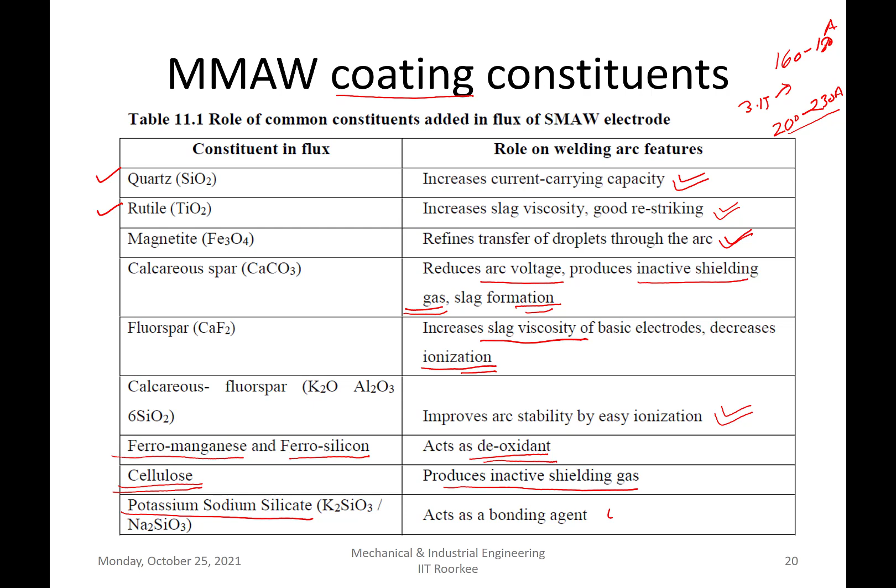And these are the two very common binders, potassium and sodium silicates. These constituents are mixed in potassium or sodium silicate, and then applied as coatings over the electrode, acting as a binding agent. So this was about the role of the different constituents added in the SMAW electrode.

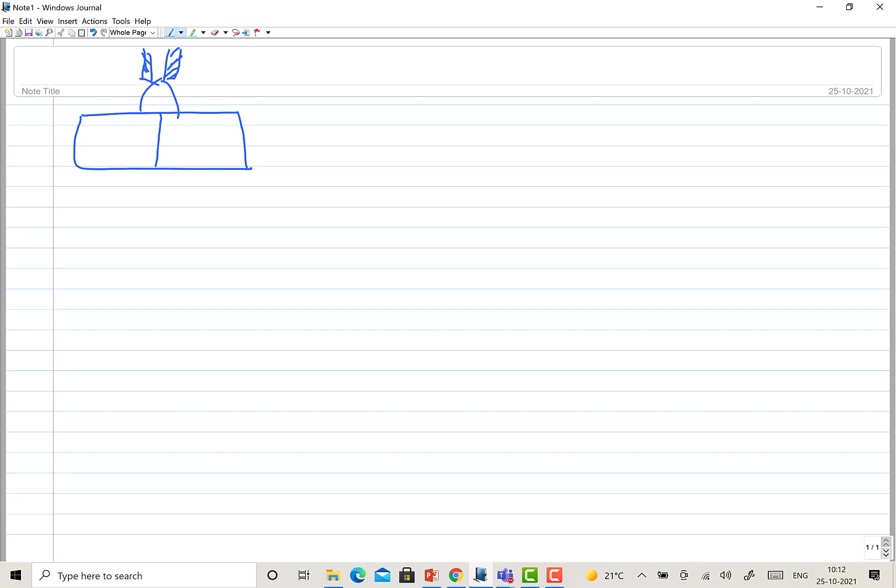Apart from this, important parameters related to SMAW govern the way melting takes place. You have the base metals, and you supply heat through the arc from the SMAW electrode, which consists of the coating and core wire. Depending upon the current flowing and the arc voltage between the two, the power of the arc is decided: V times I, voltage into current.

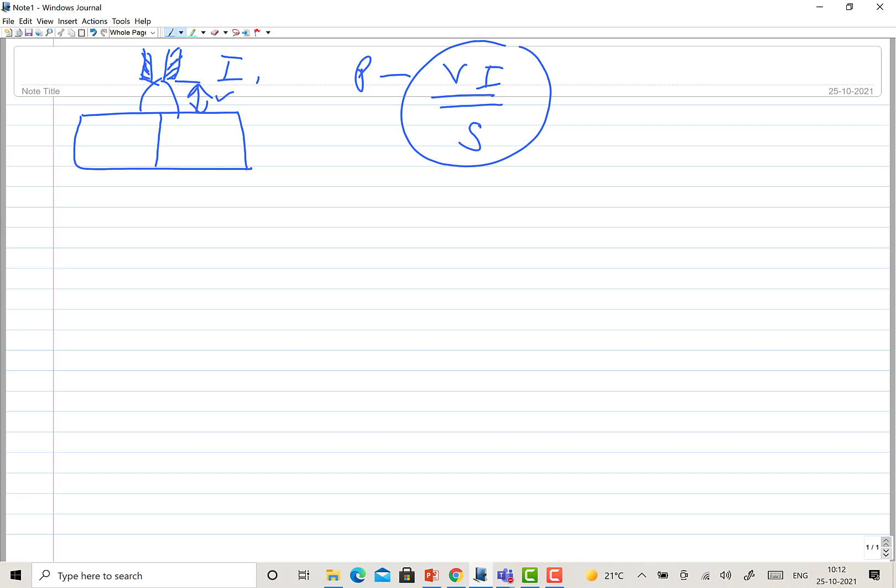Now, at what speed you are moving the arc determines the net amount of heat being delivered. So you are generating heat at a particular rate, but if you move fast or slowly, that will dictate the net amount of heat being delivered, which is quantified as kilojoules per mm.

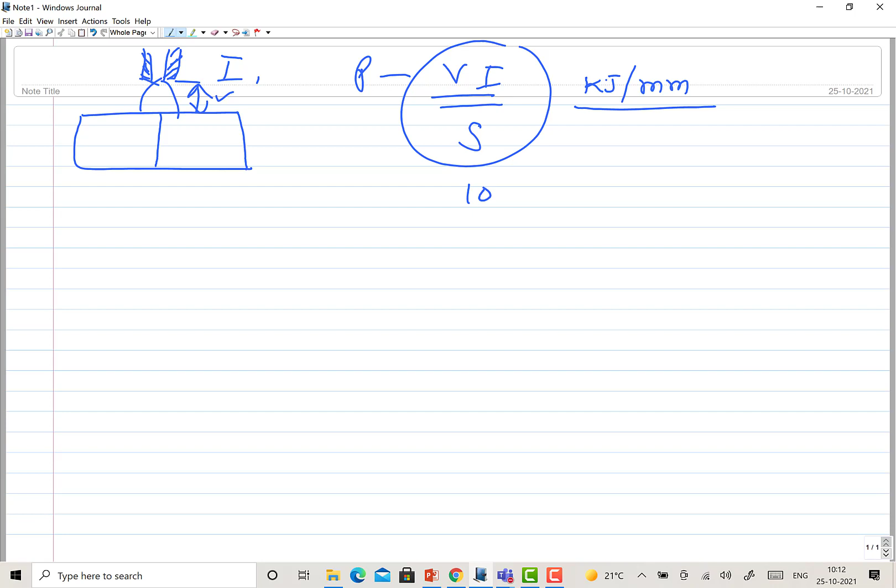For example, say you are using 10 volts arc voltage and 200 amperes current, and the speed is 10 mm per second. So 200 joules per mm will be the heat supplied per unit length of the weld, and converted into kilojoules, that is 0.2 kilojoules per mm.

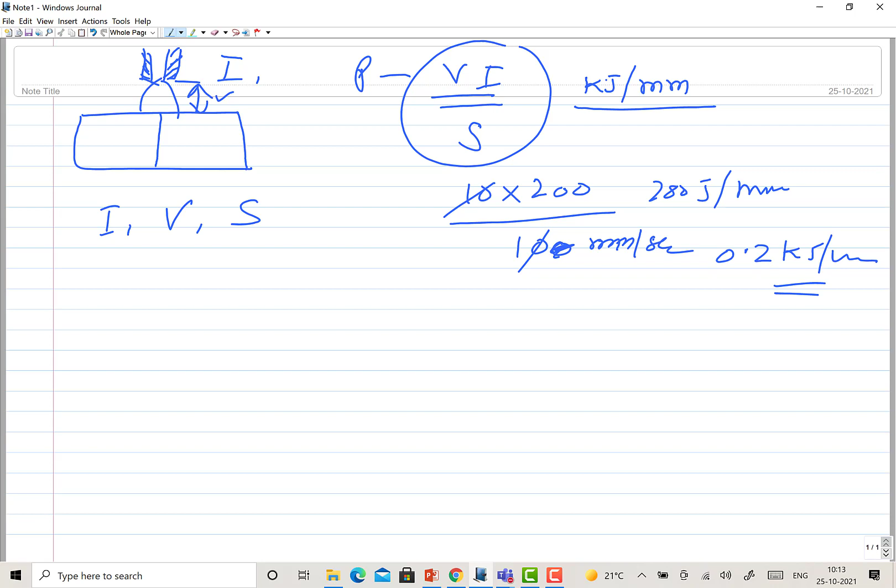Like this you can write. So the point here is the speed. The current, voltage and speed are three very important welding parameters in SMAW, which dictate the net amount of heat supplied to the weld during welding.

Say these are the components to be welded in top view. The arc position, if you are moving the arc at 10 mm per second or at 2 mm per second, that will dictate how much heat is being delivered. If you move the arc slowly or fast, that determines the amount of heat delivered. Lower the welding speed, greater will be the amount supplied for a given voltage and current setting.

If we check how current and voltage affect heat, voltage is normally not used to adjust the heat input because it is electrode-based and usually low. Voltage for SMAW can range from say 15 to 30 volts, or even 50 volts. But for other arc welding processes like gas metal arc welding or gas tungsten arc welding, the arc voltages are quite low, but the current value can be significantly high.

So if we study the effect of current, it primarily governs the heat generation. Whenever current is changed, increasing current increases the depth up to which the arc is melting. You are supplying heat from the top, so the arc is able to melt up to a certain depth. This depth up to which melting is realized is known as the depth of penetration.

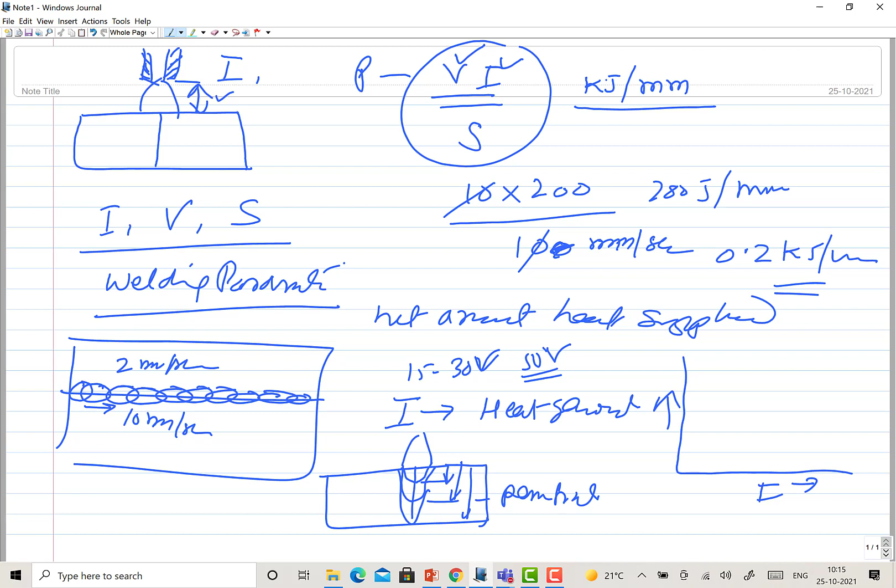We can express this depth of penetration on the y-axis, and the x-axis shows the current, starting from say 100 to 500 ampere. How does penetration change? Initially it increases linearly, and then it becomes constant.

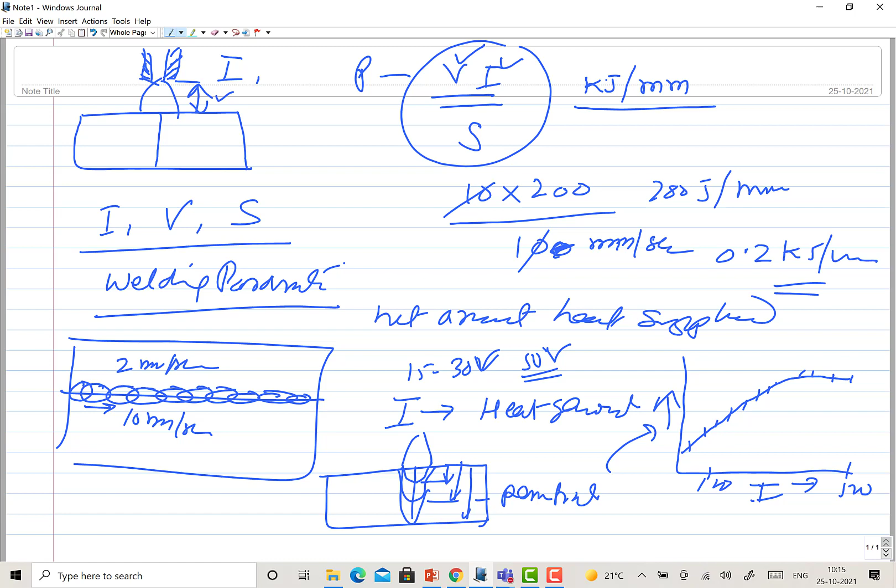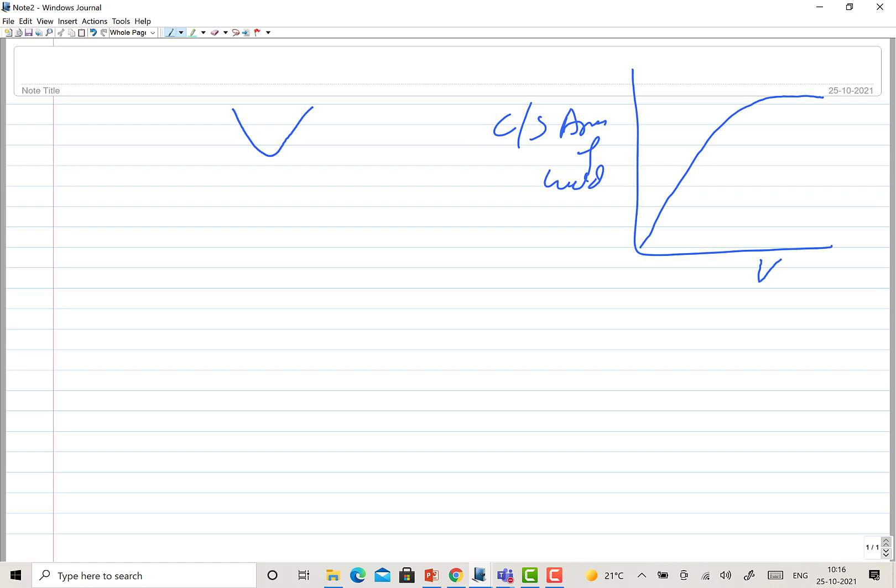The same is true for the weld cross section. When welding current is increased, the cross sectional area of the weld also keeps on increasing and then becomes constant. Initially the weld will go like this, then it will become so. This is how for say 100 ampere, 300 ampere and 500 ampere, the weld cross section will keep increasing and then become constant.

Whatever heat you are supplying remains at the top, not able to go deeper, and most of the heat is absorbed by the molten metal and is not able to reach the bottom. So the area becomes constant almost after reaching a particular value.

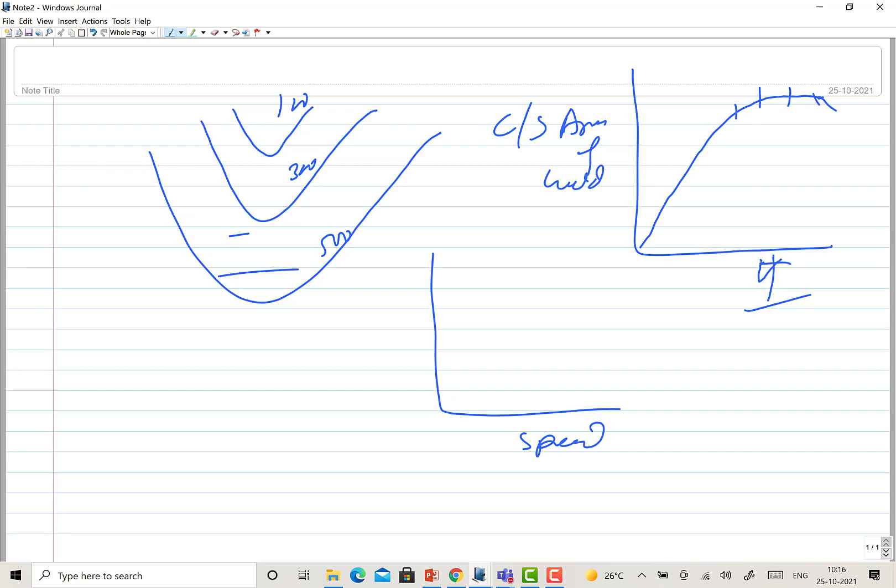Now as far as speed is concerned, initially as welding speed increases, there is a need for an optimum for maximum penetration. Neither very low nor very high welding speeds will help. Why? Because when moving at a very low speed, most of the heat will be localized at the surface only, and a lot of heat will be delivered but limited to the top, not able to reach the bottom.

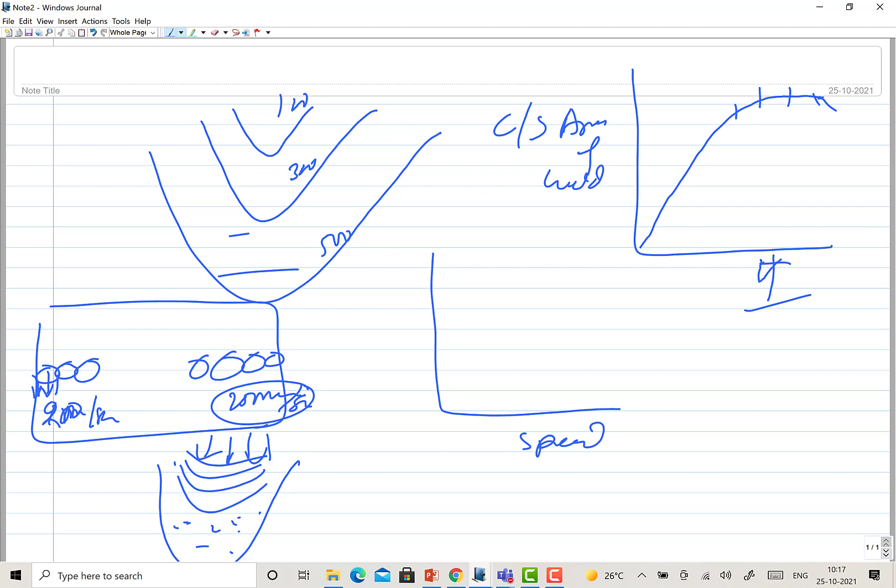At the top you may have molten metal, and most of the heat is taken by the molten metal only there. The same is true when moving at very high speed - you are supplying very limited heat, say at 100 mm per minute, or 2 mm per second, or 20 mm per second. When moving very fast, you are supplying less heat, and similarly when speed is very low, you are moving very slowly.

So actually the penetration and speed relationship goes like this: initially the penetration is low, then it starts improving, then it reaches maximum, then again it starts decreasing. So the penetration versus speed relation goes like this.

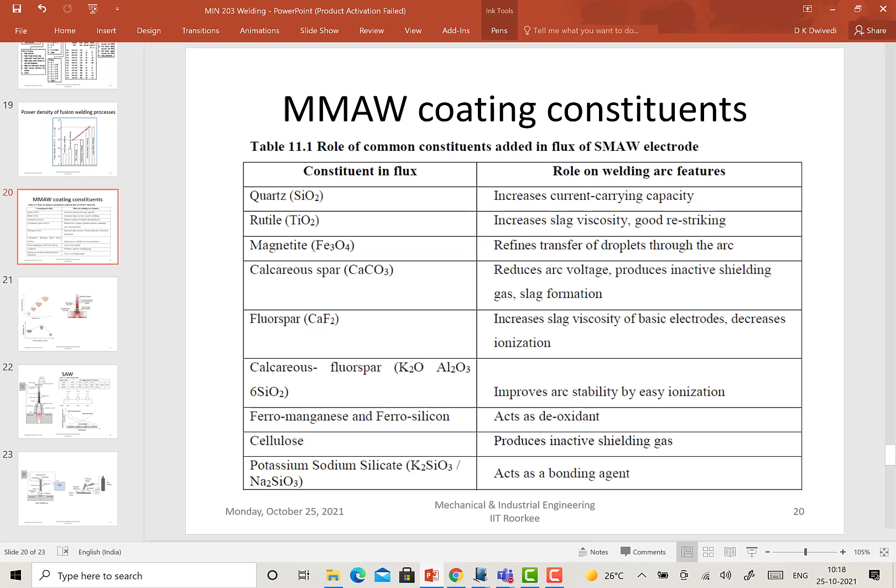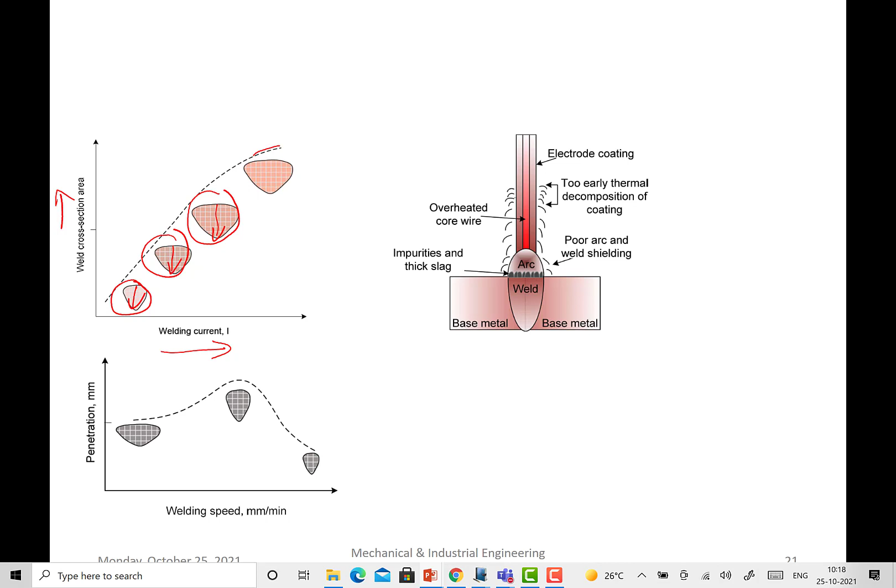So this is what you can see as far as welding parameters and their effects are concerned. That is what I wanted to show with the help of these diagrams. Increasing welding current increases the weld cross sectional area, as you can appreciate from these. Penetration is less initially, then it keeps increasing along with the cross sectional area, but it tends to start getting stabilized.

This is about the effect of welding speed. When speed is low, heat input is more and weld cross section is large. When speed is very high, heat input is less, so weld cross section is less. You get the optimum cross section as well as penetration when speed is optimum.

Now about the current and electrode diameter relationship. Say this is your electrode, and you are supplying current for an electrode of 2mm diameter using 500 ampere current. So 500 ampere current will be flowing through the core wire of the electrode. By I-square-R-T heating, when the diameter is small, excessive I-square-R-T heating will cause excessive heating of the electrode itself.

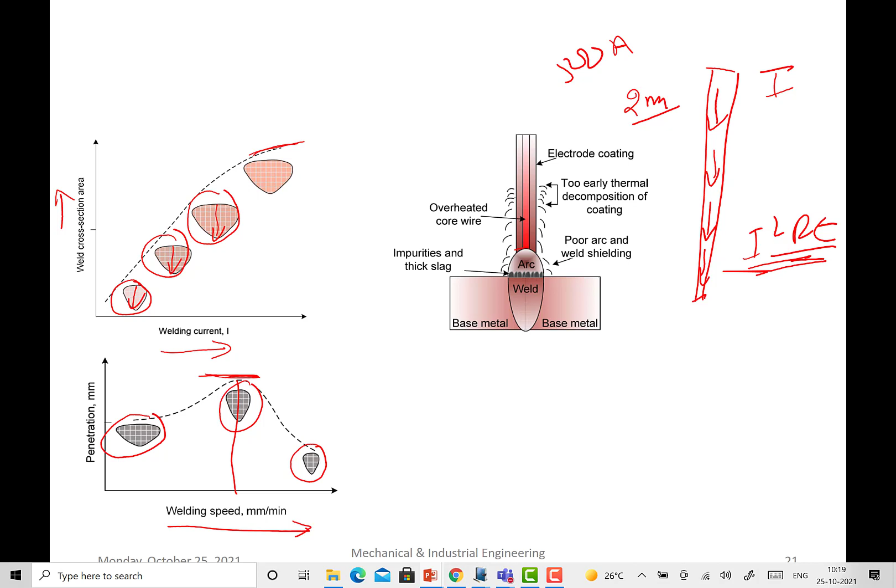So it is possible that the coating will start getting thermally decomposed much earlier than when it is needed. Electrode coatings are expected to get thermally decomposed near the arc, but if excessive heating takes place, coatings may get damaged much earlier and you may not get the desired shielding effect, because they will get burned earlier than they should.

So it is very important that the welding current is selected as per the diameter of the electrode. As I've told you, it is 35 to 40 times the diameter for the current that can be used. This is a thumb rule, although with different metals or kinds of coatings being used, there can be minor adjustments on the higher or lower side.

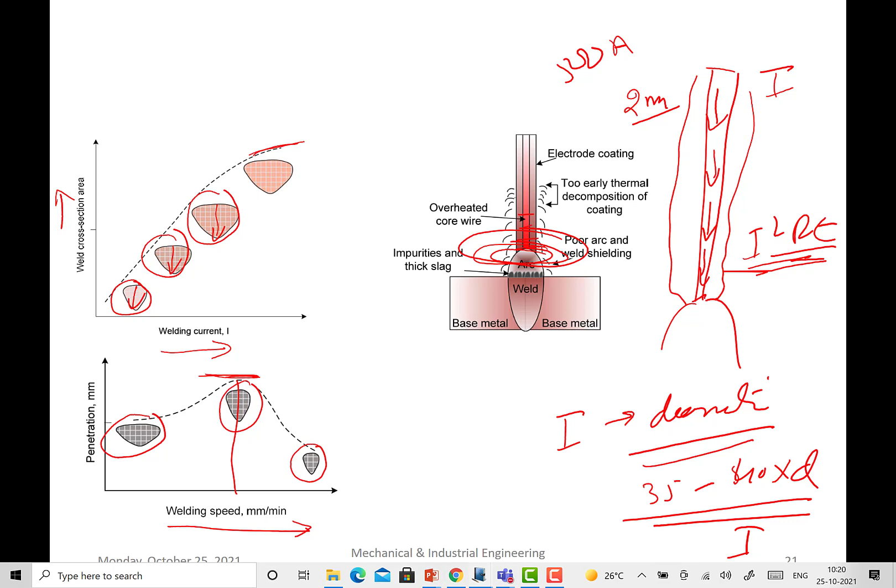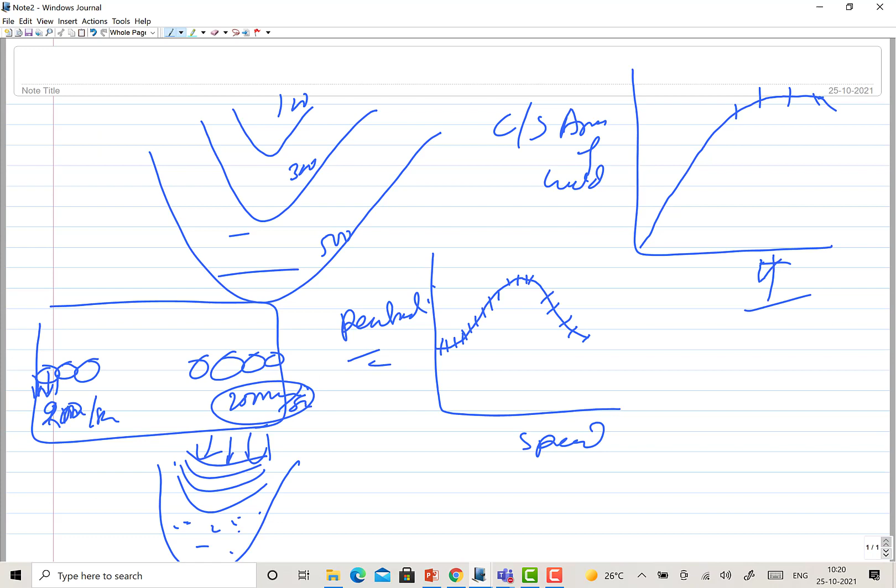So this was about the effect of the welding parameters. Now coming to other parameters related to welding, other aspects related to welding, like how do we select the welding current.

You have got AC and DC, both kinds of power sources can be used. So for selection of welding current, current is the most important aspect in arc welding. It is important that proper welding current is selected in terms of its magnitude and its type, AC and DC.

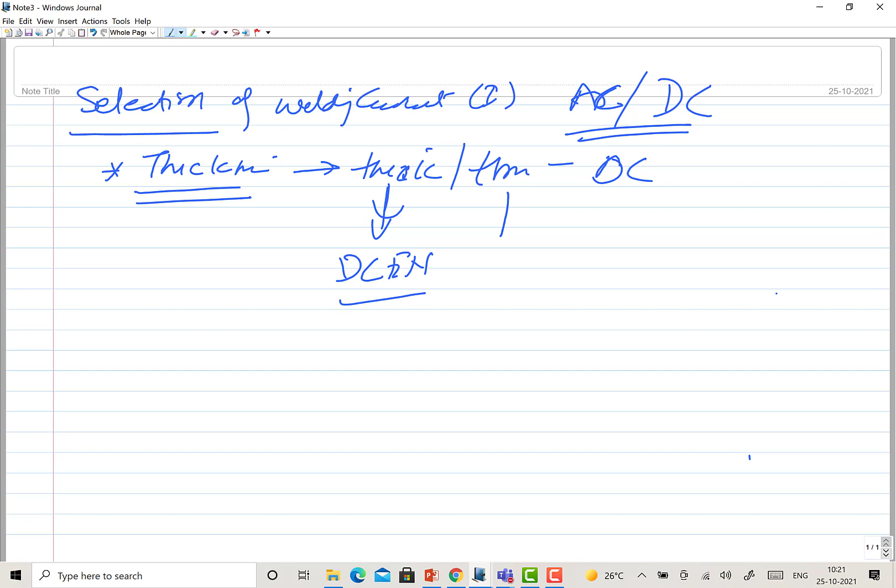There are a few things kept in mind, like the thickness of the section to be welded. When it is very thick or very thin, in both cases we prefer DC, because it allows you to decide how much heat you want to generate on which side. If you want to generate more heat on the workpiece side, you go with DC straight polarity, and if you want less heat on the workpiece side, you go with DC reverse polarity. This is because more heat is generated on the electrode side in case of DC RP, so you can go for thin sheet welding. So whenever the thickness to be welded is on the very high or very low side, we prefer DC as compared to AC.

Now cable length is another aspect. If the cable length is running in meters, say 100 meters, 50 meters, to reduce excessive voltage drops in the cables, we prefer AC over DC. AC is preferred over DC for longer cables. So in shipbuilding or pressure vessels where very lengthy cables run from the power source, we prefer AC as compared to DC.

Now, ease of arc initiation is much better for DC as compared to AC. Arc stability is also very good for DC because current magnitude and direction remain constant, while in AC, as it passes through the zero level, its magnitude and direction both change, so it is not preferred.

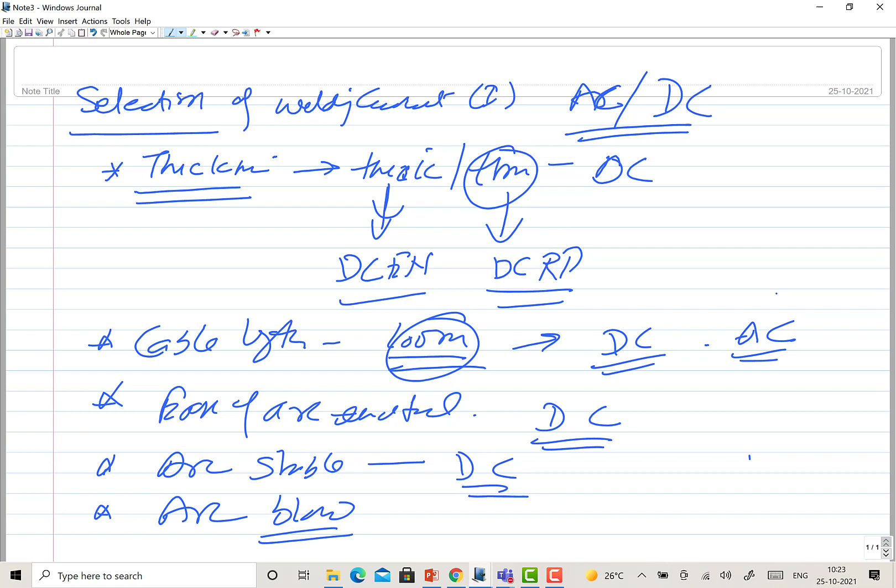Then arc blow is a phenomenon I haven't talked about yet. It is about the deflection of the arc from its path. Normally this is the electrode axis, and this is the arc coming. Under unique situations, the arc tends to deflect either forward or backward. This deflection of arc from its intended path is called arc blow. This is common in case of DC only. But if the arc blow problem is very severe, we can switch over to AC, because the deflection in AC is neutralized in every half cycle, so you don't find any kind of arc deflection or arc blow.

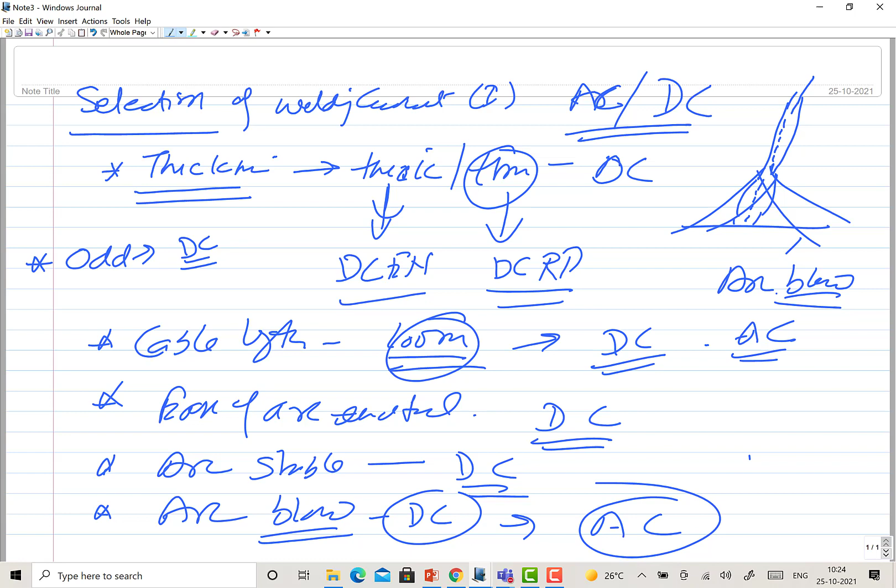So this is another aspect related to the choice of welding current. Then one more thing, for odd position welding, whenever it is horizontal, vertical, or overhead, the tendency for molten metal to fall down is very high. So we prefer DC, so that at least you can control the amount of heat you want to deliver, as compared to AC. So these are the few aspects which need to be considered while choosing the suitable type of welding current.

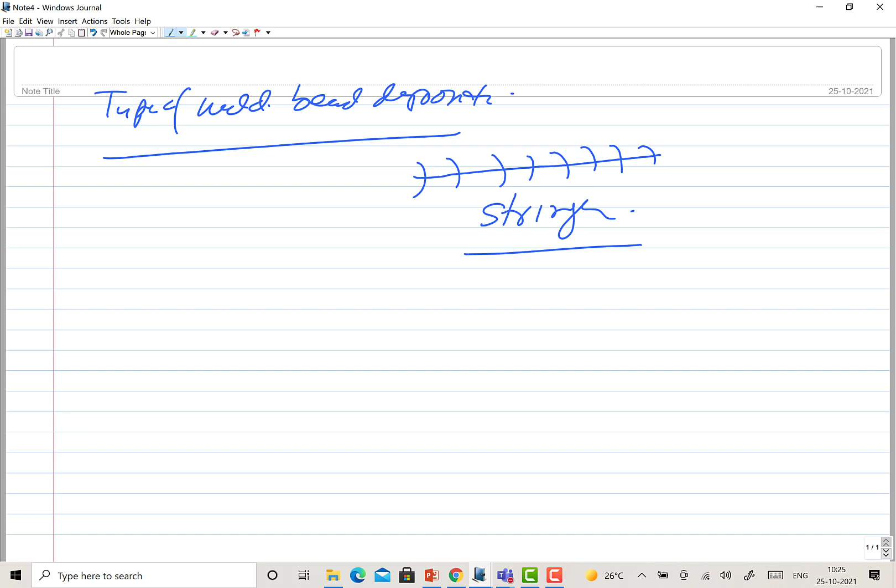Now, how do we deposit the weld bead? Let's talk about the types of weld bead deposition, or the way by which the weld bead is deposited. The simple way: when the arc is moved straight in one particular direction with no lateral movement, the weld bead is deposited in this manner. This is called a stringer bead.

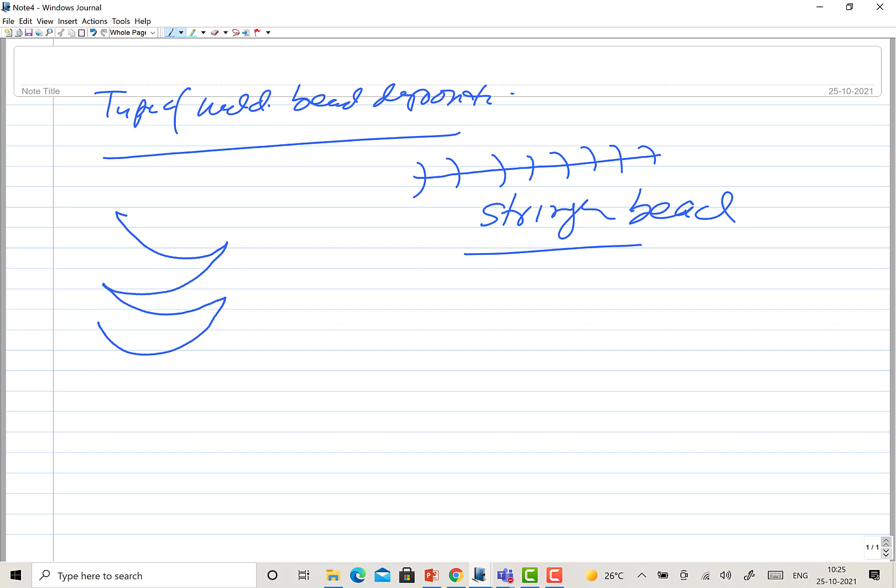When welding in odd position, for better control over the heat input and better control over the molten metal, you may move the arc laterally like this, generating a wider weld bead. There can be a number of other possibilities like this, different patterns, but this is one of the most common ones.

Whenever the bead is generated through lateral movement in different patterns, we are able to generate a wider weld bead. In this case, we have much better control over the molten metal as well as the heat input, so you avoid a melt-through situation, and you are able to deposit the molten metal at the desired location very efficiently.

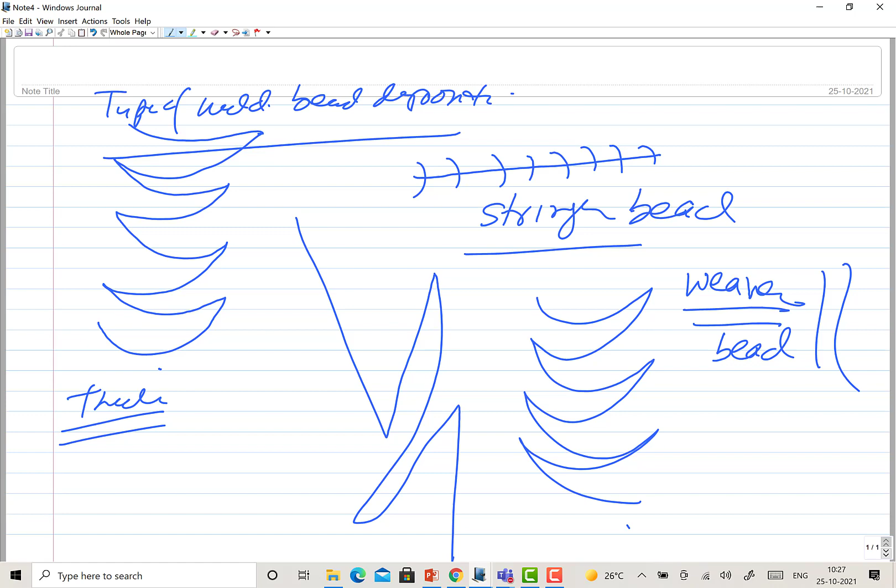So especially when welding thick sheets or thin sections, weaver beads are preferred. In thin sections, a weaver bead helps reduce the heat input at a particular location, so melt-through is avoided. In thick sections, it allows the desired spread of molten metal at the location where you want to deposit it. So this was about the types of bead.

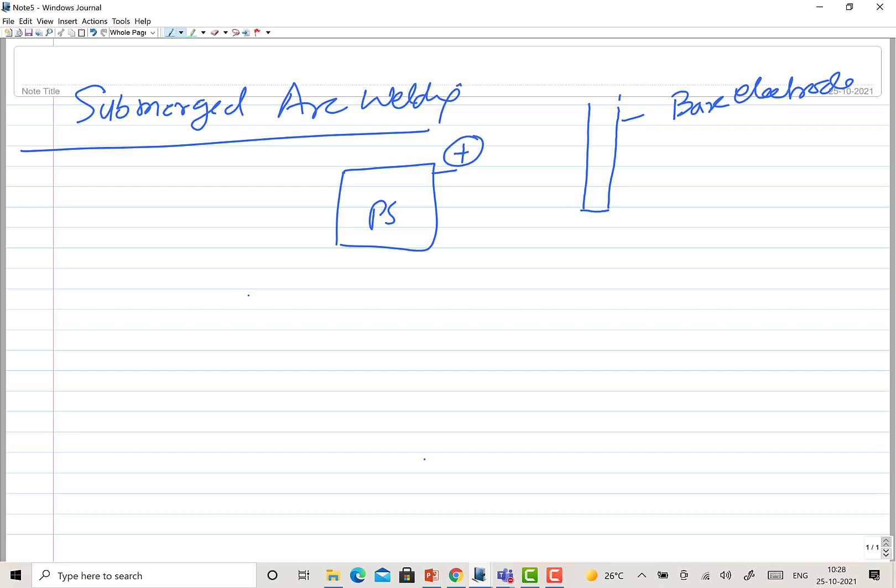I think I have talked a lot about shielded metal arc welding. Now I will take up another very interesting arc welding process, called submerged arc welding. Why is it called so? Because the electrode used is a bare electrode, not coated, and it is connected to the power source. Usually we connect DC with the positive terminal connected to the electrode, and the negative terminal connected to the workpiece. These are the components to build.

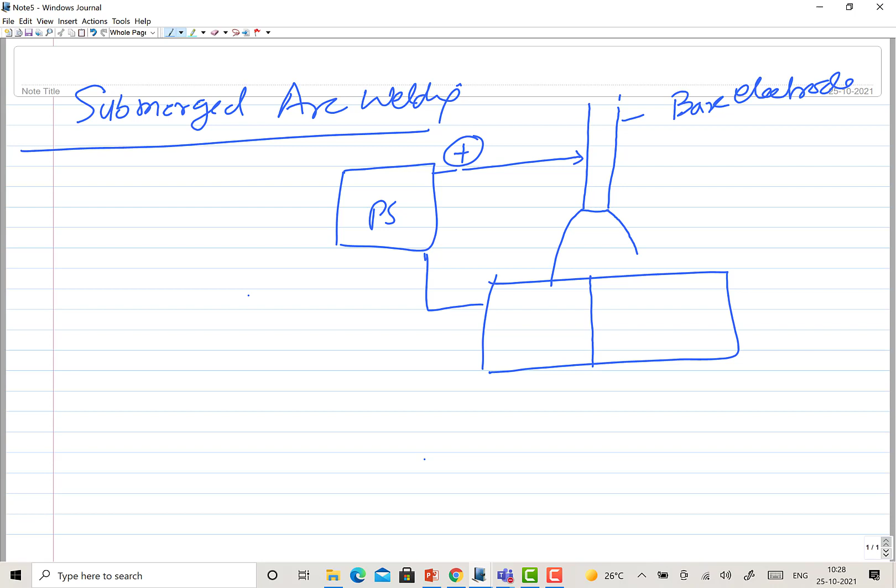So we strike the arc, and once the arc is there, heat is generated. This is how it happens. Now the unique aspect of SAW, submerged arc welding, is the protection or shielding of the weld pool.

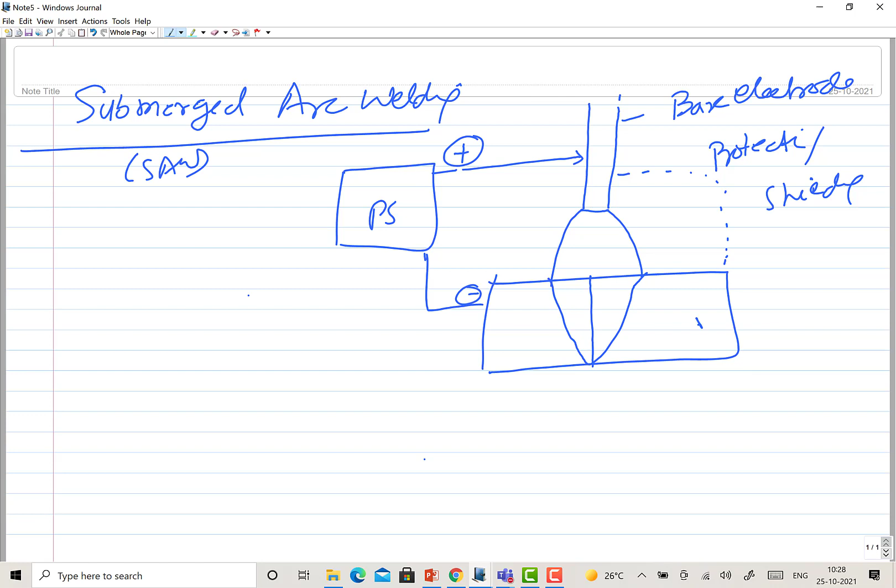What we do in this case is feed granular flux, not coated flux. The granular flux is supplied from a hopper, and from there we feed this flux powder, which covers the arc completely. So basically the arc is submerged in the flux.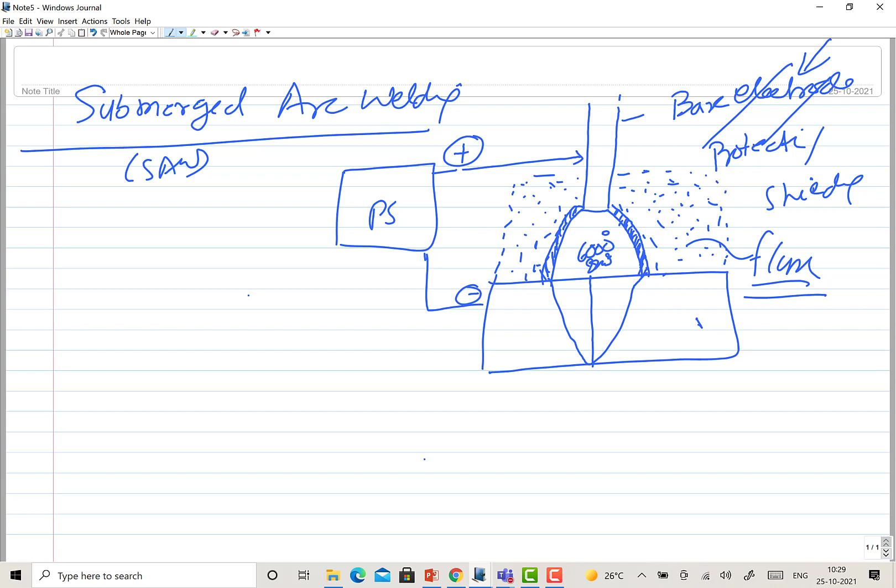The arc generates a temperature of about 6000 to 8000 degrees centigrade, so obviously the flux will be melting. A very thin layer of flux is brought to the molten state, and all around, a thin flux layer cover is formed. This thin flux layer provides protection to the weld pool from atmospheric gases. The arc generates heat, transferring it to the base metal for welding, and all around the arc you have a molten flux layer, with powdered flux above that.

The molten flux layer continuously melts and flows down, floating over the surface of the pool. This is a continuous process: melting of the granular flux and then flowing down, forming a thin layer all around the arc, which continuously flows down. Since the arc is below the flux, it is called submerged arc.

The unique feature: submerged arc welding is known to be a very high current welding process for joining thick sections.

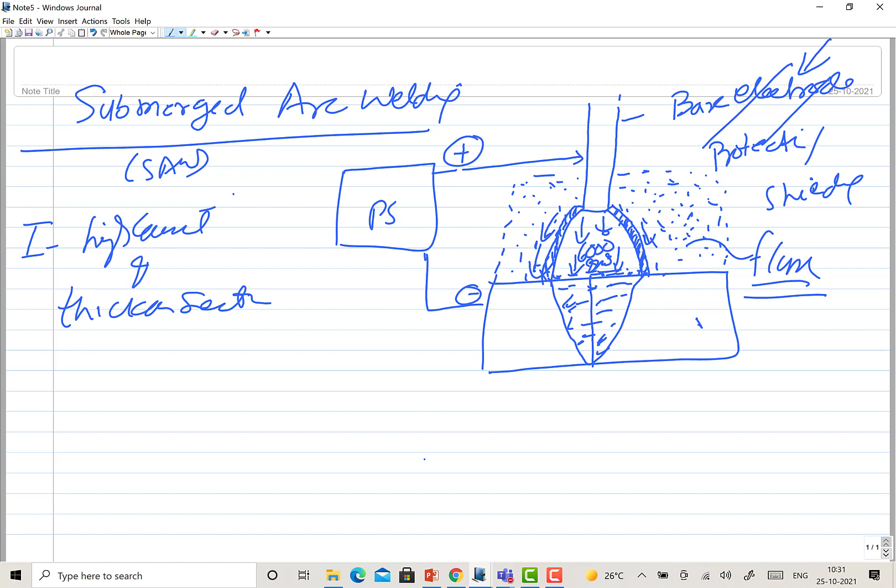Current as high as 2000 ampere can be supplied to the electrode, depending upon the diameter. So starting from say 300 to 2000 ampere current is very commonly used in SAW, submerged arc welding process.

So the welding current is high, therefore it is preferred for welding of thick sections, not thin sections. Not necessarily below 10 mm, this process is used because of the high heat input. It allows the welding of thick sections. So these are two or three very important features as far as this is concerned.

And the third one, which you can appreciate very easily, is the spatter-free welding that is performed. What is spatter? Between the electrode and the base metal, molten metal is transferred, melting from the electrode, and it gets transferred to the weld pool.

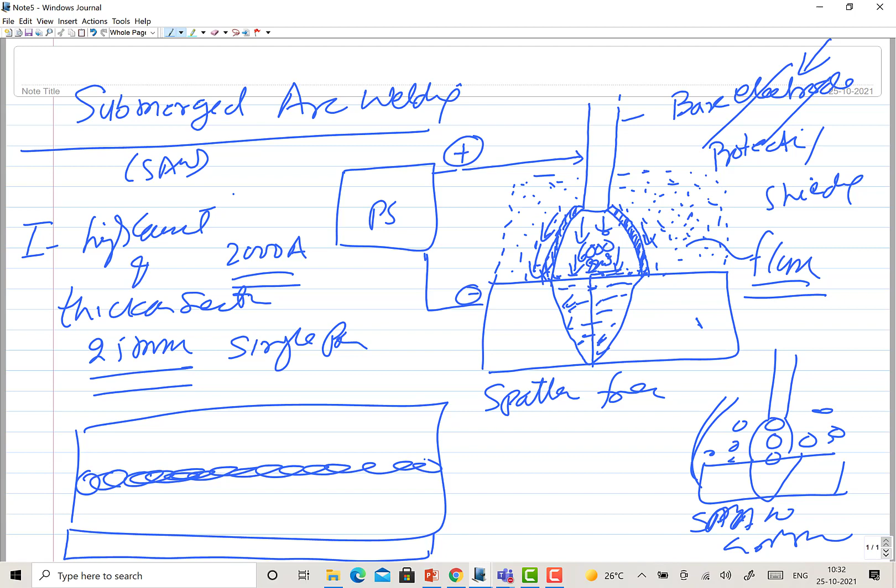But part of the molten metal will always be falling here and there in other welding processes like SMAW or GMAW. In all these processes some spatter is always there. But in case of submerged arc, since the arc is covered by the molten flux layer, there is no scope for spattering, and therefore whatever molten metal is produced at the electrode tip is completely transferred. So spatter-free weld is produced, number one.

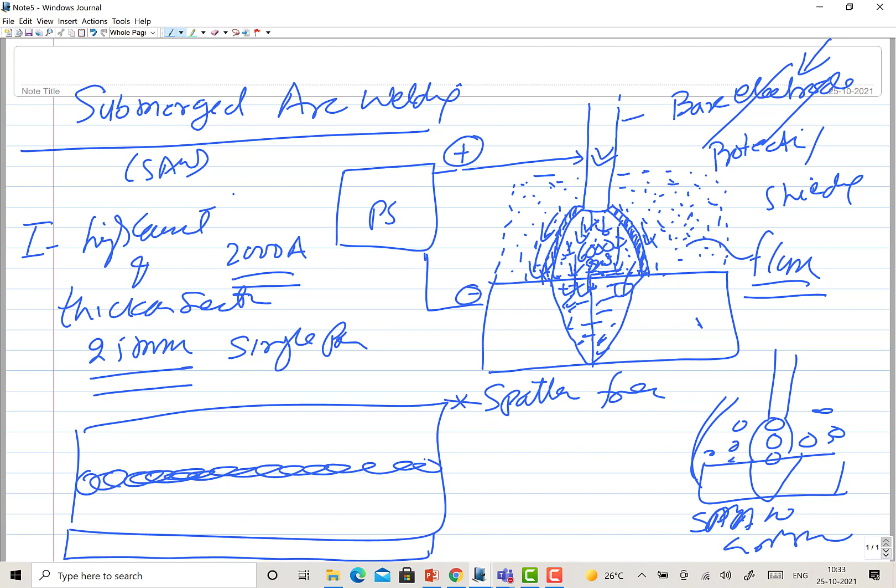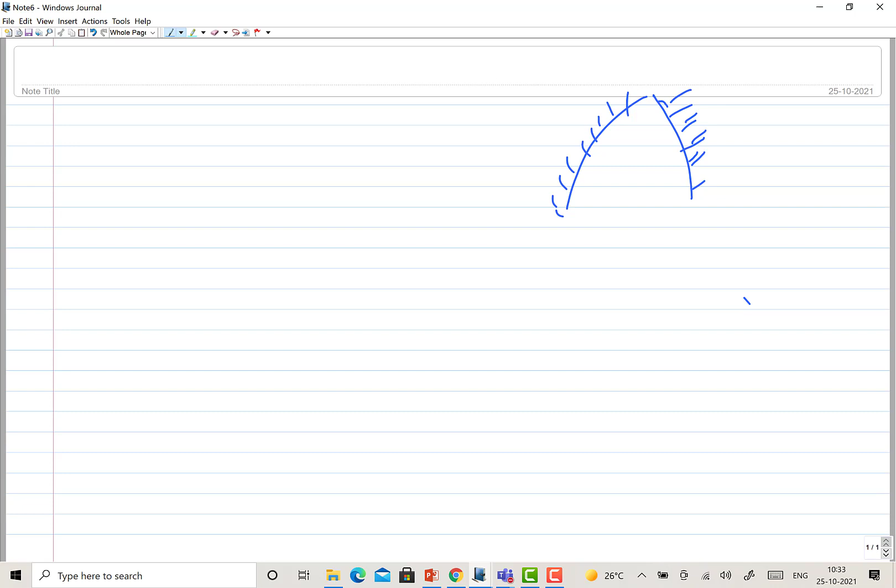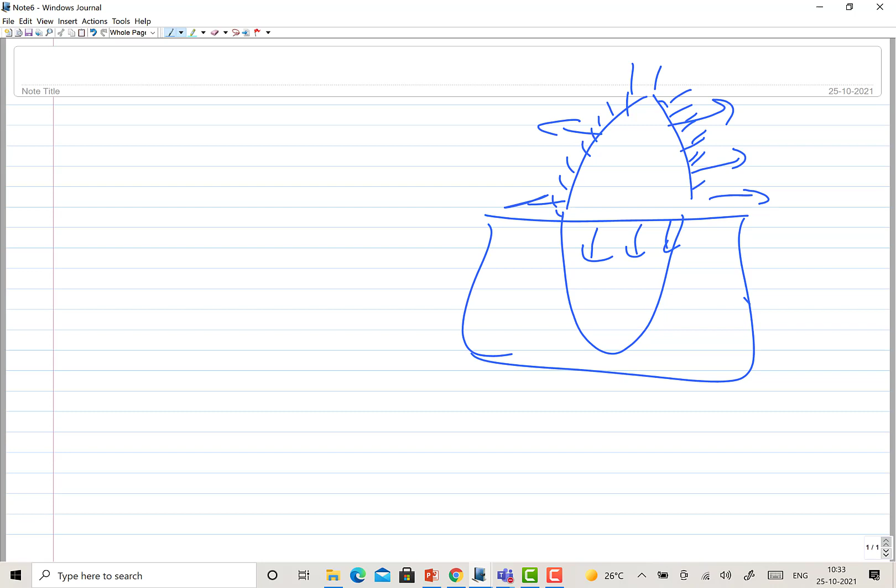Number two, whatever heat is generated by the welding arc, everything is used because the arc is covered by the molten flux layer as well as the unmelted flux layer. So it doesn't allow the losses of heat from the arc. Whatever heat is being generated, most of it is used for the melting.

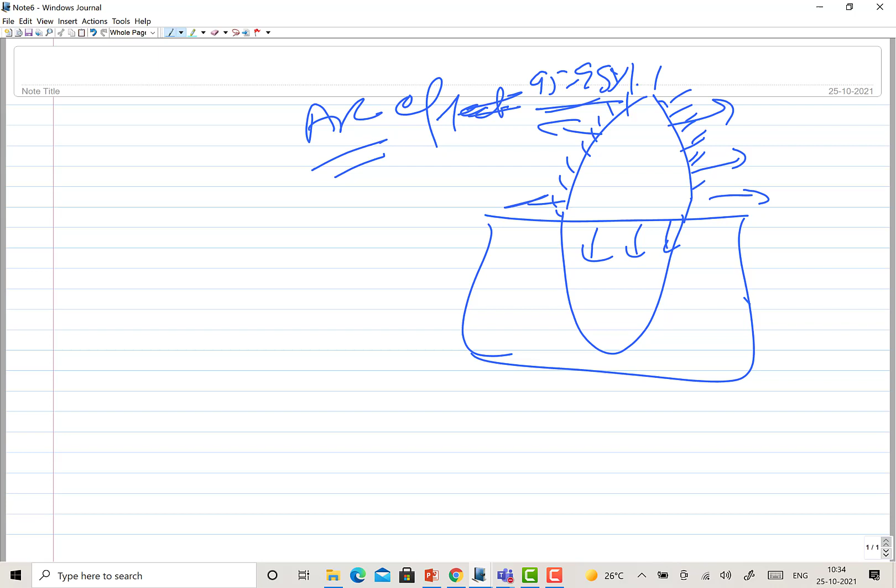So arc efficiency offered by the SAW process is like 95 to 99%. Very limited losses of heat will be there from submerged arc welding, while in case of shielded metal arc maybe 70-80%, and in TIG it is 40 to 50%, because a lot of heat losses happen from the welding arc, and not all the arc heat generated is used for fusion and welding purposes.

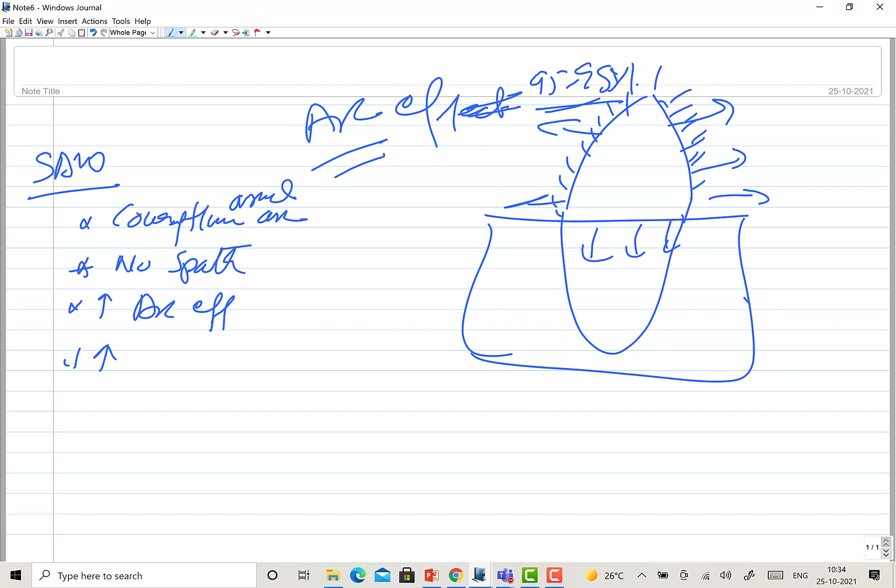So the few unique features of SAW: one, the arc is covered by a cover of flux around the arc. The second, no spatter or spatter-free, very high arc efficiency, very high welding current, and joining of thick sections. These are the very interesting features related to the SAW process.

So how it is performed, and what are the different systems which are used, I'll show you one PPT, one small slide.

On the flux part, I will come later. So thereafter only I will be talking about these aspects.

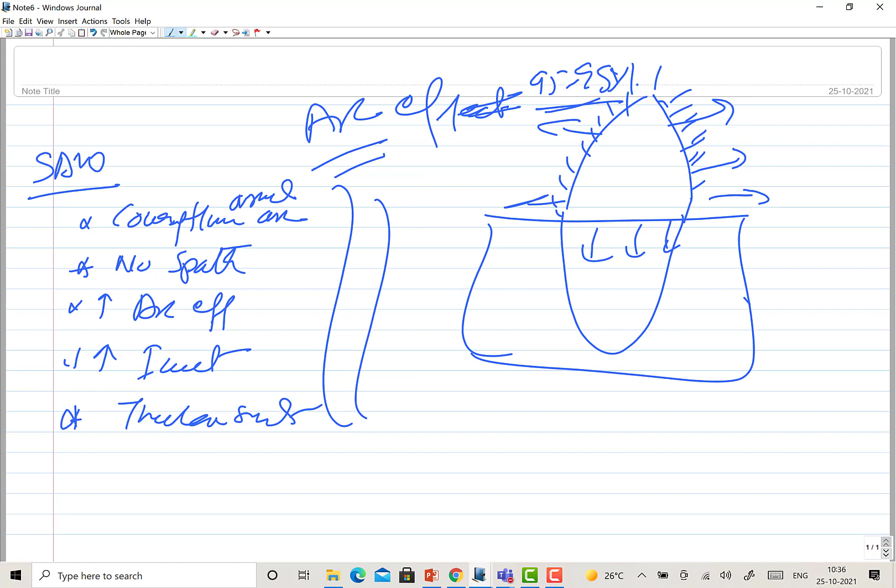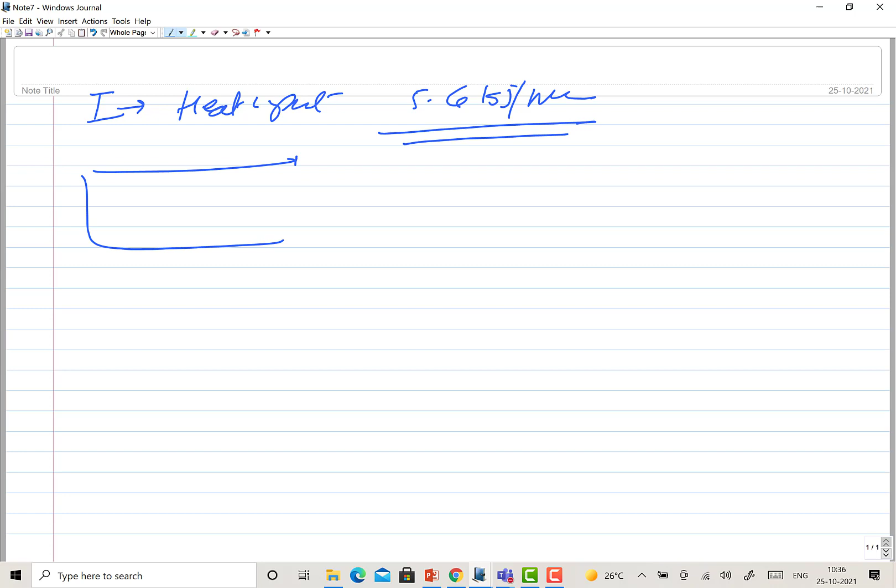As far as the system is concerned, apart from these aspects, since the welding current used is very high, 1500 to 2000 ampere, heat input in these processes is also high, like 5 or 6 kilojoule per mm is very common. Because of the high heat input, the weld size is very large and the heat affected zone is large, very wide. So wide heat affected zone and large weld size.

So these are the side effects of the SAW process - wide HAZ. But when the heat input is more, heat input is inversely proportional to the cooling rate encountered by the welded metal or the heat affected zone.

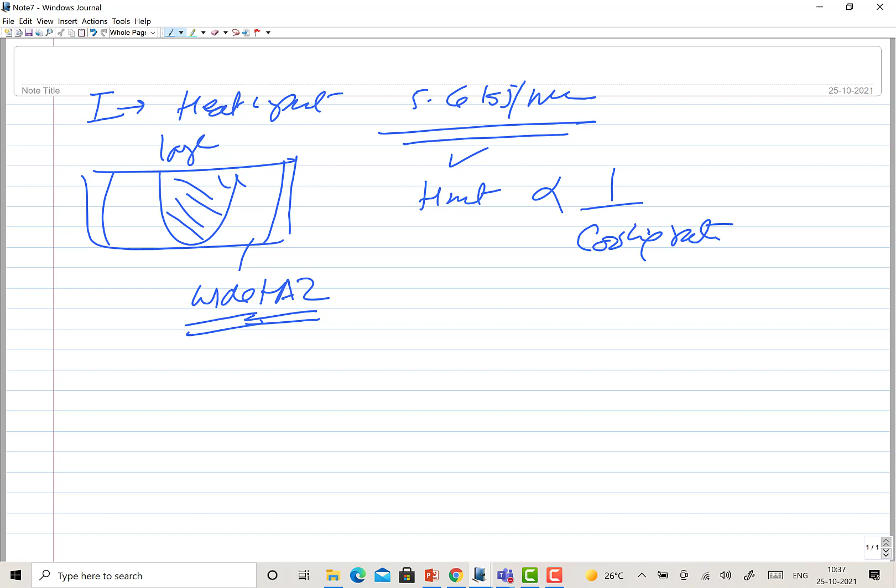So higher the heat input, the cooling rate will be just opposite. Higher the H net, lower will be the cooling rate. So things will be cooling slowly.

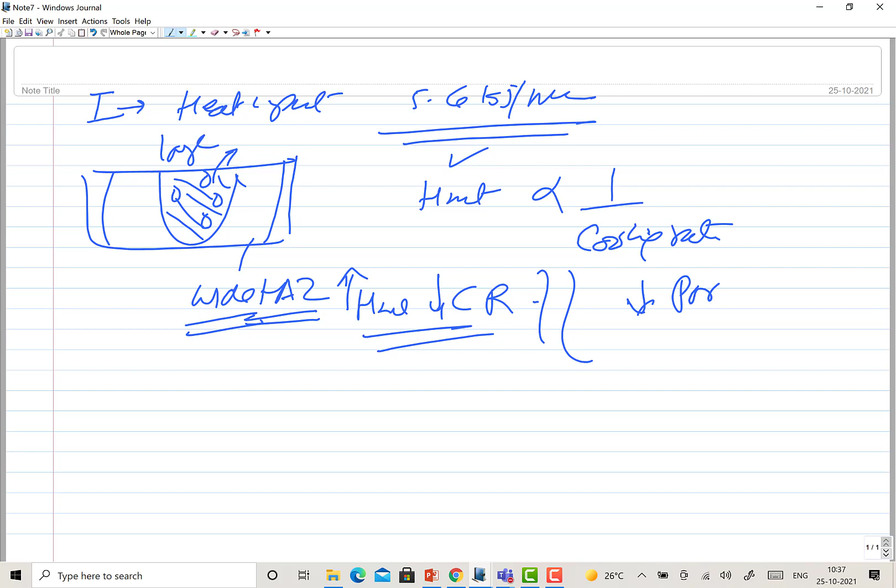When things cool slowly, there is enough time for the weld metal to solidify, so the gases will have a tendency to escape. That in turn reduces the porosity tendency. Because of low cooling rates and longer solidification time, gases have enough time to escape from the weld metal, and therefore porosity is very limited.

On the other hand, the cracking tendency of the weld is less, especially of hardenable steels. So hardenable steel cracking tendency is reduced because of the low cooling rate, and the porosity tendency is also reduced. Since there is enough time for weld metal to solidify, the weld bead is very smooth. This is another interesting aspect, primarily related with H net, leading to low cooling rate, and low cooling rate results in all these benefits.

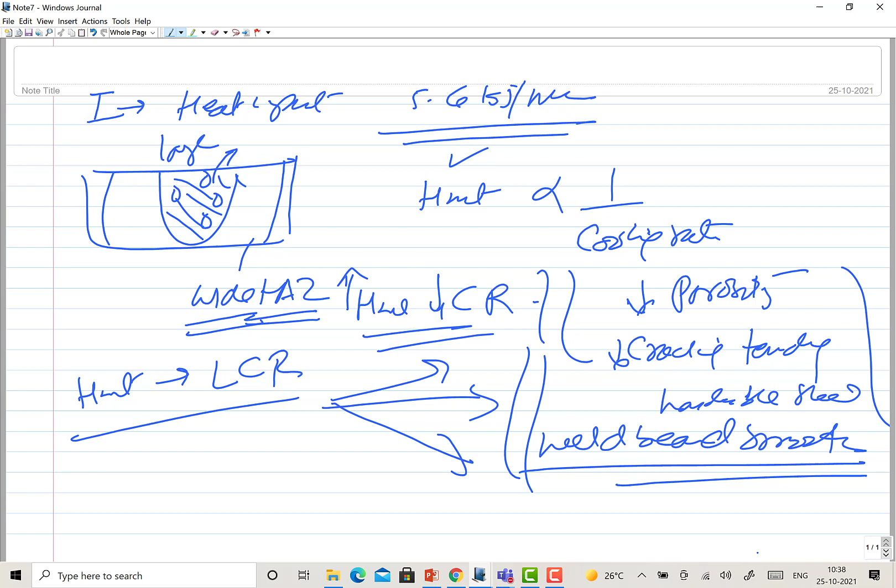Coming to the system, as far as the system is concerned, SAW comprises 3-4 things. One is your power source.

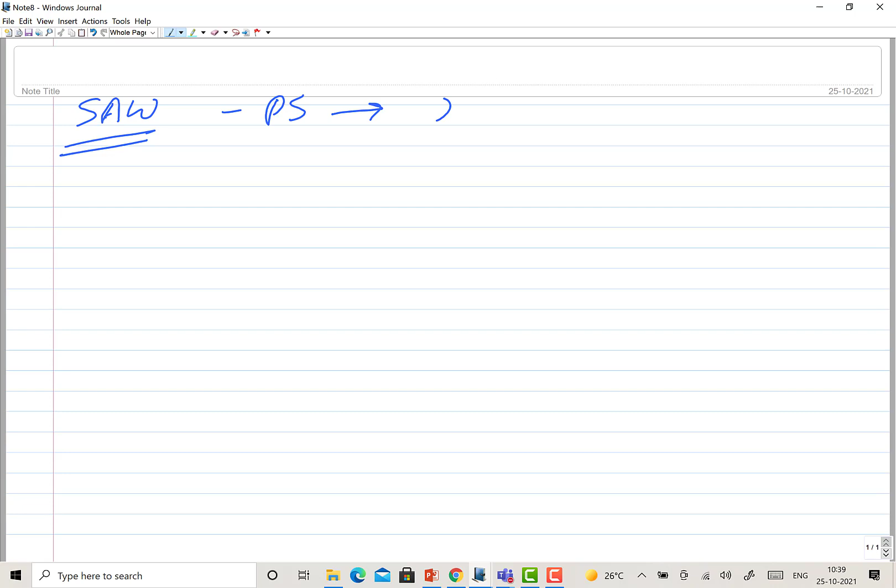Power source typically uses DC RP, reverse polarity, especially when small diameter electrode is used. But DCEN is used for large diameter electrode, like 5 mm or 6 mm diameter electrode. DCRP is preferred for the small diameter electrode.

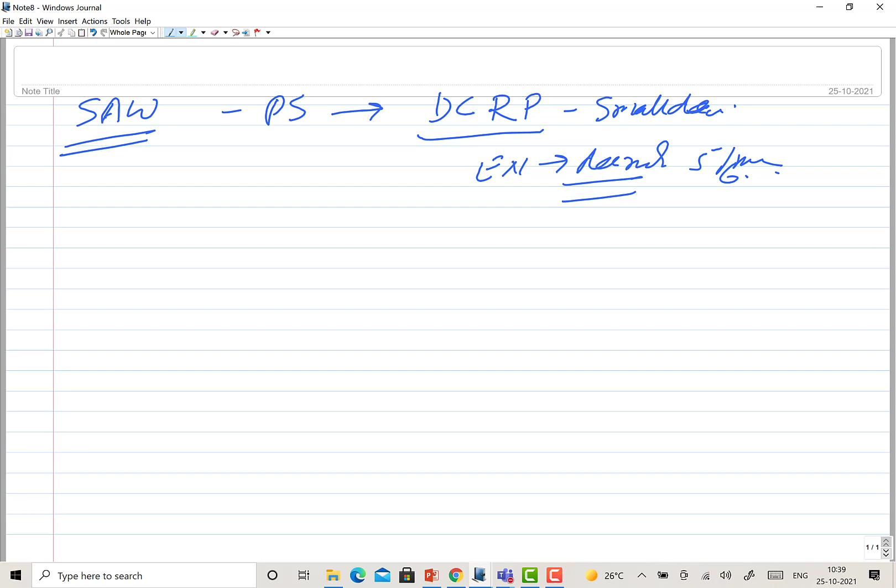Now as far as the electrode is concerned, usually this is the bare electrode of the material that is to be used as a filler for welding of the base metal. So it can be matching composition, under matching, or over matching, as per the case.

So bare electrode, but in case of steels, the electrode is usually coated with a thin layer of copper. So you will see copper coated electrodes are usually used in SAW process. The copper helps in improving the corrosion resistance, so it doesn't rust basically, and also it increases the current carrying capacity. Because of the good electrical conducting behavior of copper, whenever it is coated, it improves the current rating of the electrode. It can carry more current for the welding purpose. So the current carrying capacity of the electrode gets improved.

Okay, so that was about the electrode. Now, as far as the electrode is concerned, electrodes of different diameters have corresponding current ratings, what we use for what. So diameter in mm and current in ampere.

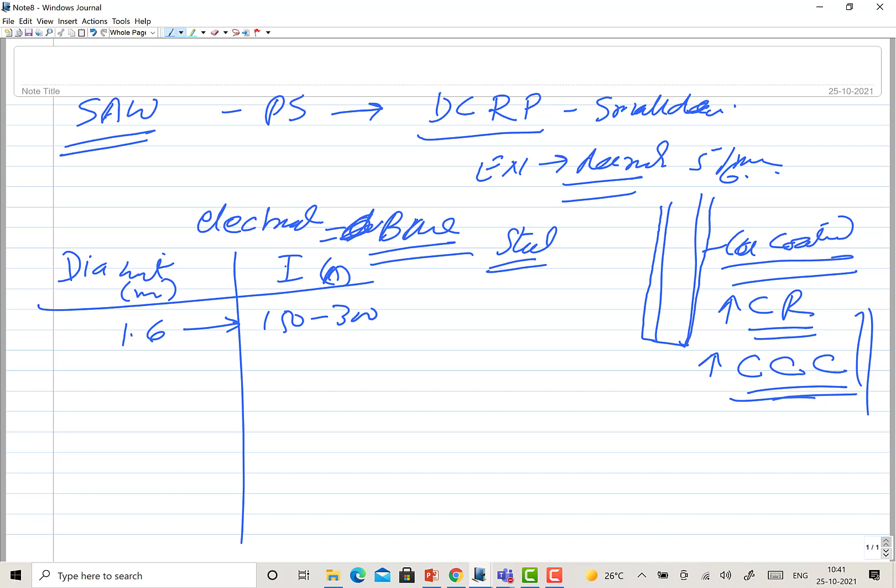Just for having some idea, electrode of 1.6 mm if used allows current from 150 to 300 ampere. The electrode of 2 mm diameter allows current from 200 to 400 ampere. For SAW the range is completely different than what I have talked about for SMAW. For 2.5 mm size it is 250 to 600.

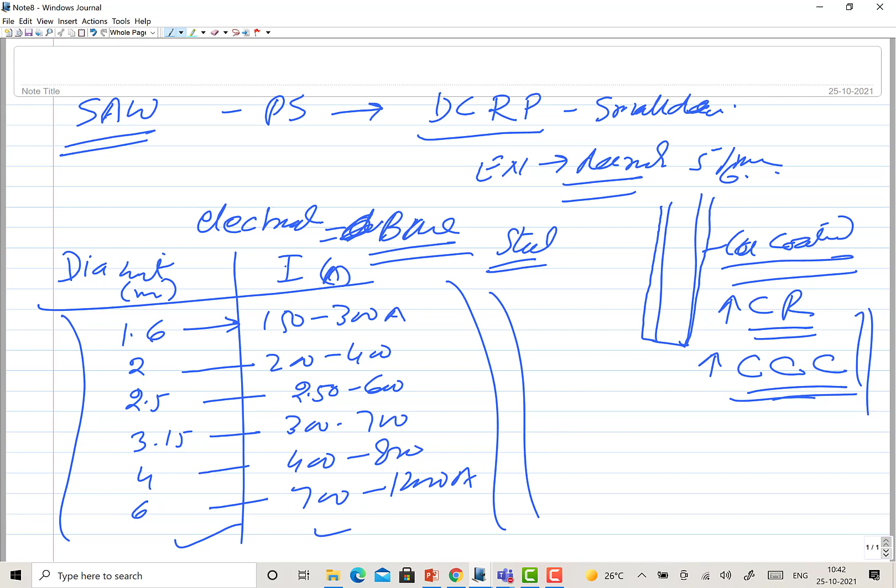For 3.15 mm diameter it is 300 to 700 ampere. For 4 mm it is 400 to 800 ampere, and for 6 mm diameter it is 700 to 1200 ampere. So depending upon the thickness you want to weld, you have to use the suitable electrode diameter so that it can handle the desired current to be used for the welding purpose. So that was about the power source as well as the electrode which is used.

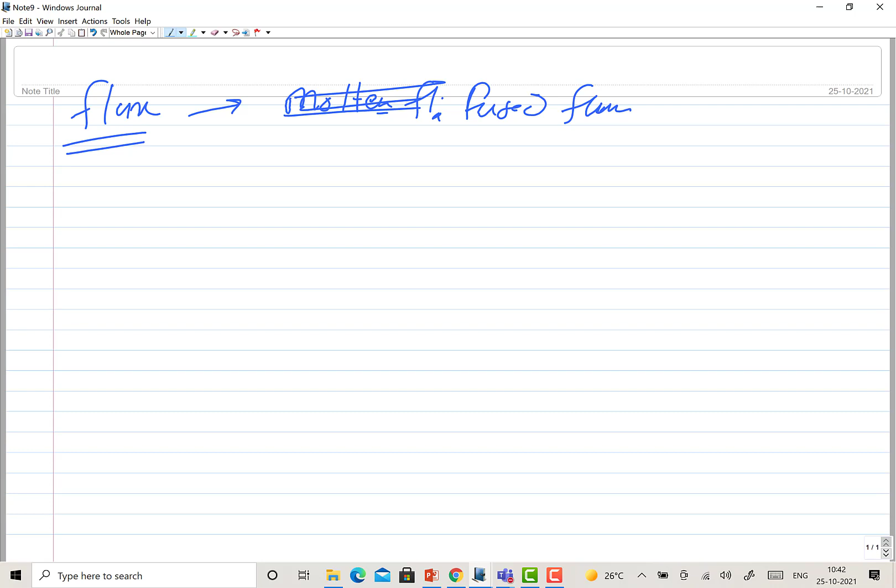Now the next important thing left is about the flux, what we use as far as flux is concerned. Commercially 3 or 4 types of fluxes are used. One is the molten flux, also called molten or fused flux. Then second is the bonded flux. Third one is the agglomerated flux, and fourth is the mechanically mixed flux.

So what we do, whatever constituents we have, they are fused, and after solidification they are crushed. In fused fluxes, constituents are brought to the molten state. After solidification they are crushed, powdered, graded, and then used.

In case of bonded fluxes, the flux constituents are bonded with sodium silicate or potassium silicate. Then they are pelletized, meaning formed into balls or plates, small pieces. This is produced, and then those are crushed, powdered, and graded. So constituents in bonded fluxes are bonded, then pelletized, or brought into form of small balls or cubes. Those are then dried, crushed, powdered, and graded. That's how bonded fluxes are used.

So in bonded fluxes, the sodium and potassium silicates are used as a bonding material. And in agglomerated fluxes, basically ceramic binders are used as compared to the sodium silicate.

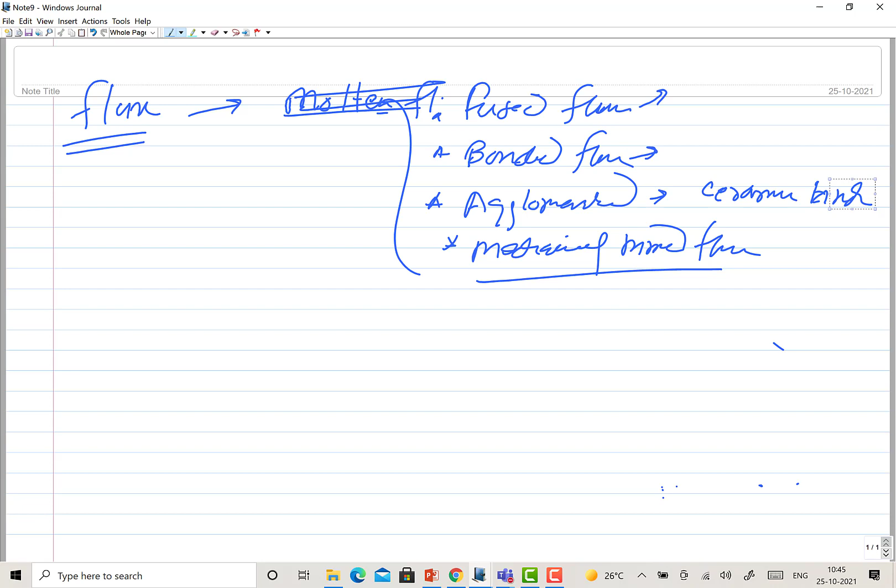Rest of the things are same as that of the bonded fluxes. The only difference compared to bonded fluxes is that agglomerated fluxes use a ceramic binder as compared to the sodium silicate used in bonded fluxes. In the mechanical flux category, various constituents are just mixed mechanically with each other and then used. So this classification is based on the manufacturing approach of the fluxes.

Based on composition, fluxes are also classified as oxide fluxes. The common oxide fluxes used are manganese oxide, silica SiO2, calcium oxide, magnesium oxide, alumina Al2O3, titania TiO2, and FeO iron oxide. These are the common oxide fluxes.

Then there are halide fluxes, which are basically chlorides and fluorides of different elements. And then we have a mixture of halide and oxide fluxes. For most general purpose and casual welding applications of SAW, oxide fluxes are used. Halide fluxes are costly, so they are used for critical applications like pressure vessels, or wherever there is huge risk to life and property. For moderate applications, like common steel welding, oxide and halide fluxes are used.

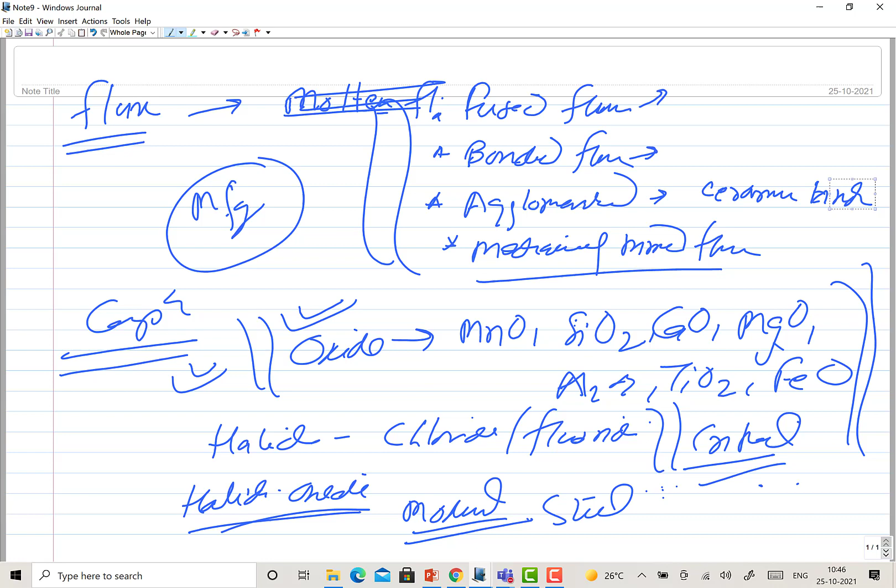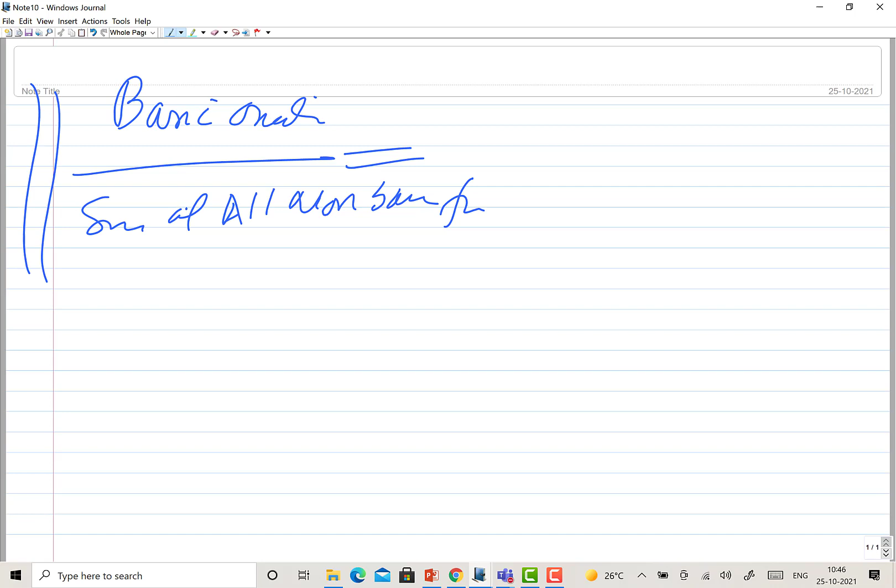These fluxes are completely different in nature - few fluxes are acidic and few fluxes are basic. This is about the oxide fluxes. The basic oxide divided by the sum of all non-basic oxide fluxes - whatever is the ratio of these fluxes, that is used to classify or determine the basicity index of the fluxes. Basicity index directly affects the cleanliness of the weld as well as the slag detachment ability. I'll show you the grouping of the different oxide fluxes.

Oxide fluxes are of three types: acidic fluxes, basic fluxes, and neutral fluxes. Acidic fluxes are like SiO2, TiO2, P2O5 and V2O5. Basic fluxes are like potassium oxide, sodium oxide, calcium oxide, magnesium oxide, barium oxide, manganese oxide, and iron oxide. Neutral fluxes are like Al2O3, Fe2O3, Cr2O3, V2O3 and ZnO.

Whatever is the weight percentage of the basic fluxes divided by all non-basic fluxes - that is, the sum of acidic plus neutral fluxes present in a flux - that dictates the basicity index. Basicity index directly affects the cleanliness of the weld, and it also affects the slag detachability. If you write BI, basicity index, from 1 to 5, you will find that oxygen content in the weld comes down with increasing basicity index. That's why it affects the cleanliness of the weld.

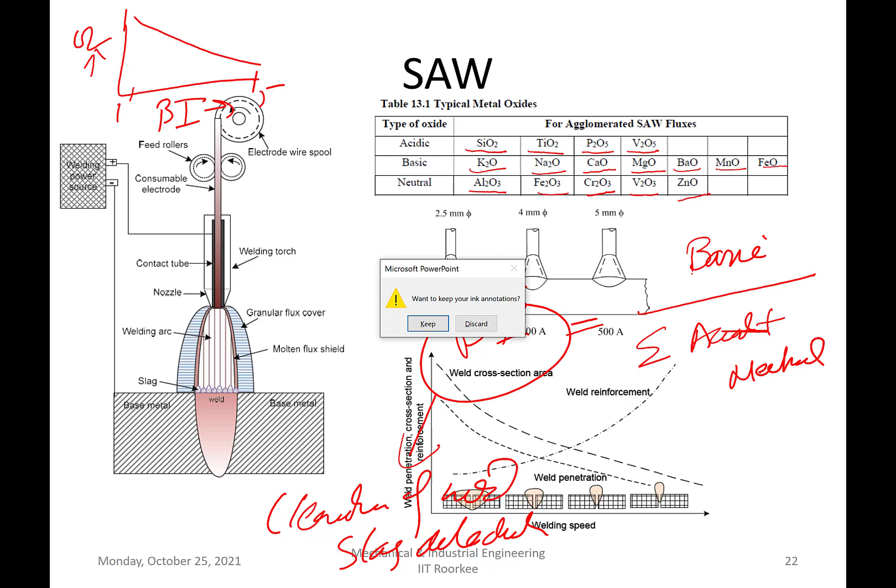In submerged arc welding, the basicity of the fluxes is quantified using this simple formula of the proportion - the weight percentage of all basic fluxes divided by all non-basic fluxes.

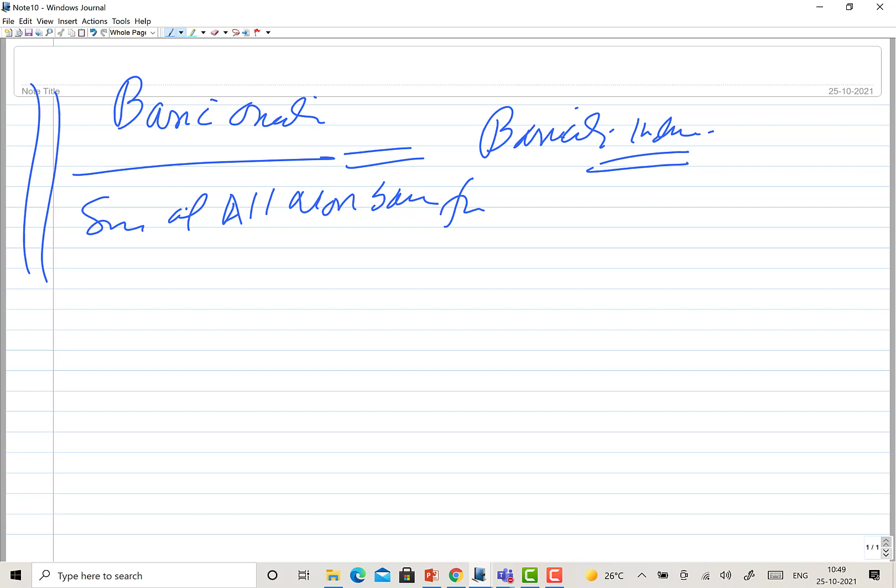Now coming to other aspects related to submerged arc welding - the effect of welding parameters in case of SAW is similar to what I've already talked about. Increasing welding current will increase the weld cross section as well as the penetration in the same way. Both weld cross section area and penetration will increase with the increase of current.

If you maintain the welding current and increase the electrode diameter - say diameter is 2.5, 4, and 5 - for a given current rating of 500 amperes, penetration is deeper with a small diameter electrode, and the weld is narrow and deep. On the other hand, with increasing diameter, the weld becomes wider and the penetration becomes shallow. The same is true in terms of welding speed.

I've already talked about increasing speed. When working with very low speed, heat input is very high, and when working with very high speed, heat input is very low. When speed is very low, the weld cross section is very large, the bead is more flat so the bead angle is low, and the penetration is also more. We don't want an unnecessarily large weld, so we want an optimum weld with the optimum bead angle and penetration.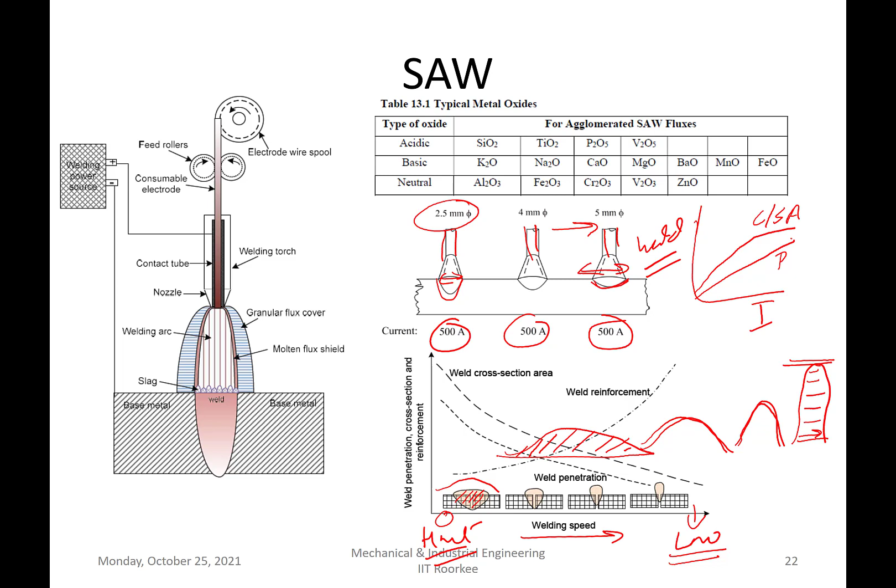When heat input is very high, it is flatter like this, so your bead is flatter with low bead angle. On the other hand, when heat input is low, bead angle keeps increasing. Increasing bead angle is actually not good, because it increases the stress concentration.

Reinforcement is increasing with increasing weld speed, because of the reduced heat input, reduced temperature, reduced fluidity, and increased piling up of the molten metal. Penetration is also decreasing with increase of speed, simply attributed to the reducing amount of heat, and the same is true for your weld cross section.

That's all about the effect of welding parameters in case of the SAW process. I think this is where I will stop. I've talked about a number of aspects related with this.

In the next lecture, I will start the new process. This is the schematic of the GTAW, called gas tungsten arc welding, or also known as TIG welding, tungsten inert gas welding.

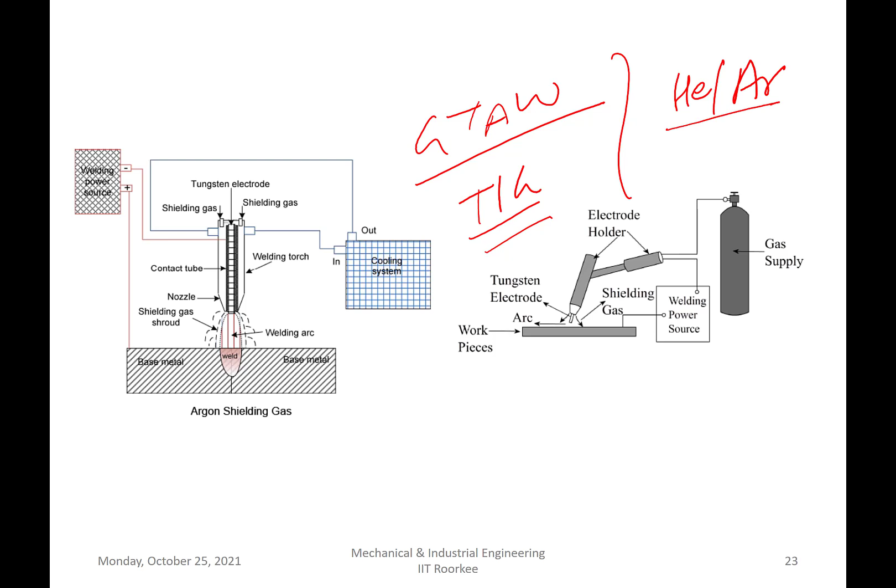GTAW primarily uses helium and argon only, that is why it is called inert gas welding. This process produces the cleanest weld, meaning the oxygen content and nitrogen content in the weld metal are minimum among all arc welding processes, around 0.05% for oxygen or nitrogen. So in terms of cleanliness, the GTAW process offers a very clean weld.

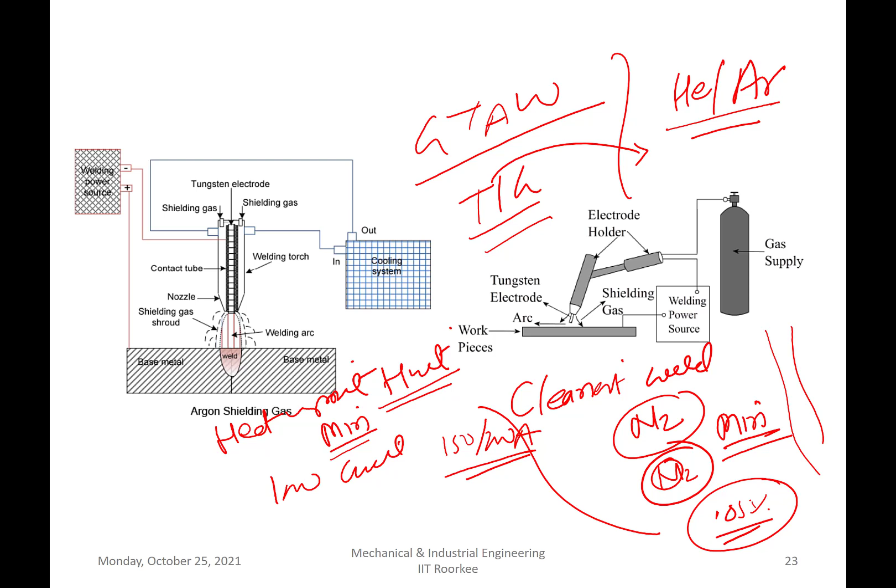The heat input supplied, which we can call Hnet, is also minimum in this case, because it uses very low current. Current is usually limited to say 150 or 200 maximum, this is the most preferred range, though it can go up to 300, but commonly we use 100, 150 or 200 amperes. So low current values are used, and the arc length is also very short, maybe 1mm, 2mm or 3mm.

Apart from the cleanest weld, it offers lower heat input. So lower the heat input, cleaner the weld, meaning the quality of the weld metal is really good, and therefore TIG welding is used for very high quality welding purposes.

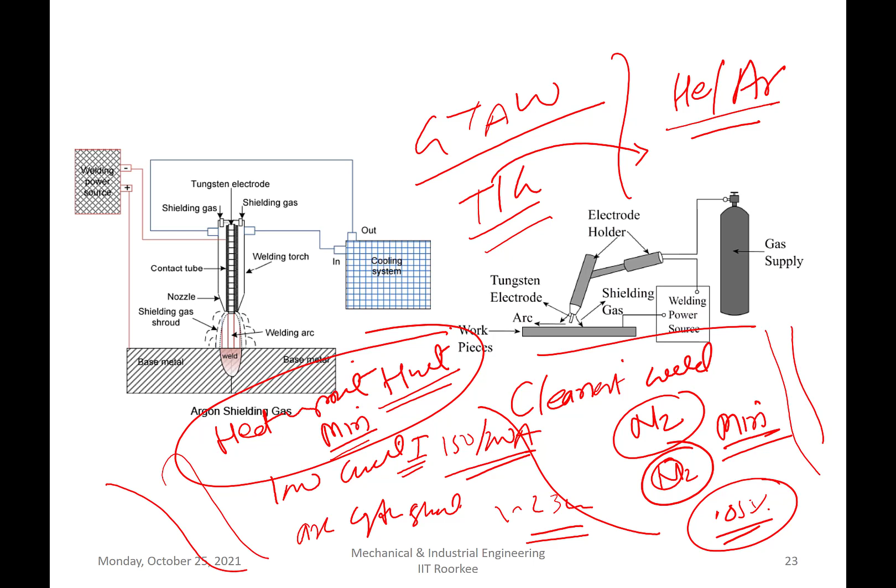Applications like aircraft, spacecraft, or nuclear reactors, wherever there is huge criticality of life and property, we prefer to weld those using GTAW, because of the very good quality weld produced due to these two unique features: very low heat input and ability to produce a very clean weld joint.

I'll be talking about GTAW in detail in the next lecture, like what systems we use, its arc efficiency, arc stability, etc. The third unique feature here is the non-consumable electrode used in TIG welding, which is tungsten - it gets its name from the tungsten electrode, and inert gas in form of helium and argon. These are the two unique things.

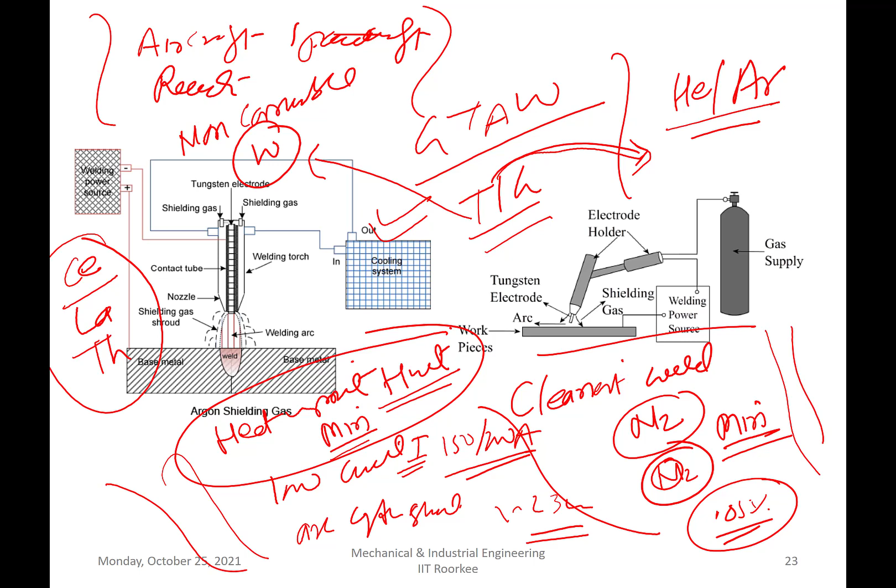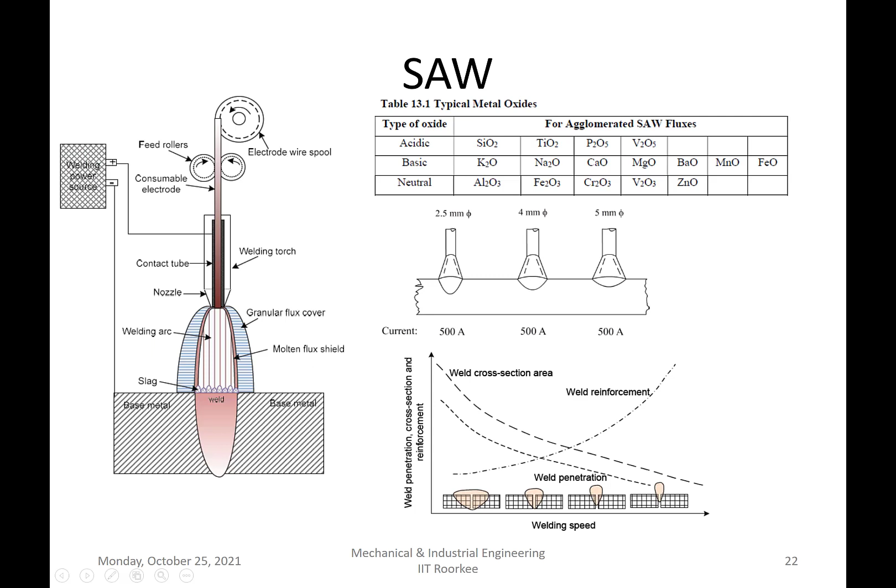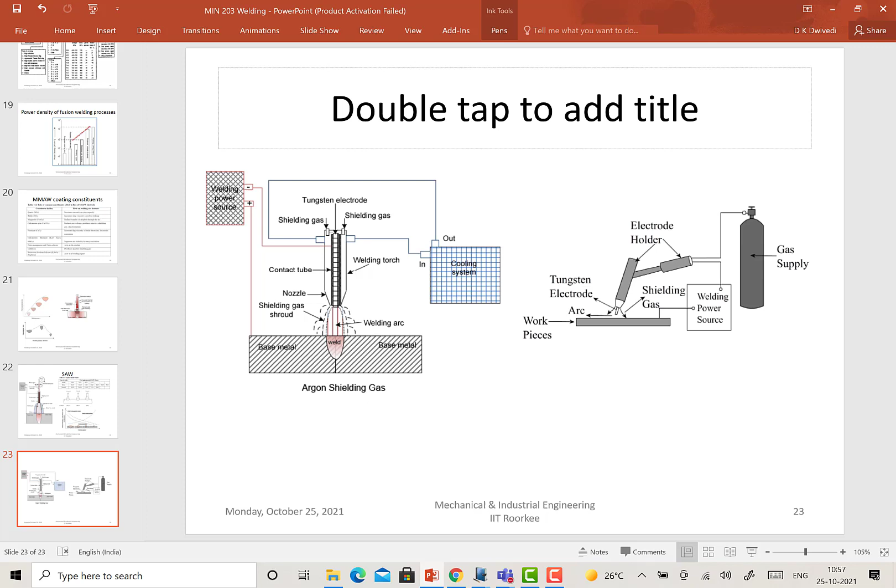These tungsten electrodes are frequently coated with cerium, lanthanum, thorium. Tungsten itself is a very good electron emitter, and when coated with about 1.5 to 2% of lanthanum or cerium, that offers very good electron emitting capability, and because of that your arc stability is extremely good. That is why we prefer electrodes made of tungsten when coated with elements like thorium, cerium or lanthanum.

This improves the current carrying capacity, meaning its ability to handle current is enhanced. The electron emission capability is further enhanced, so arc stability and arc initiation both are improved significantly with coatings of thorium, cerium and lanthanum over tungsten, although tungsten being a good electron emitter itself offers very good electron emission capabilities and therefore good arc stability, which is further enhanced with these coatings.